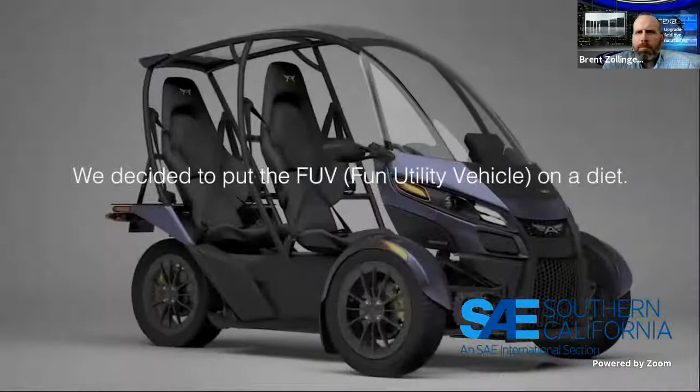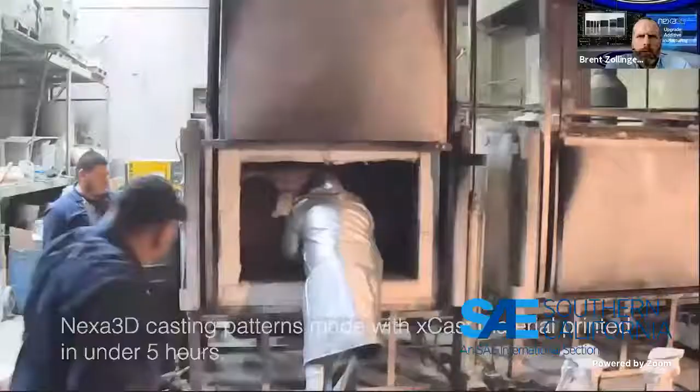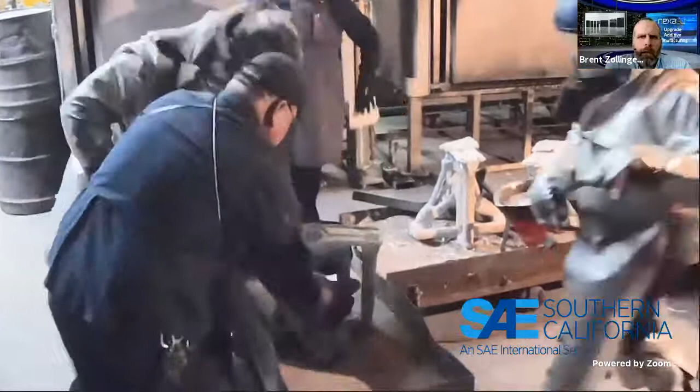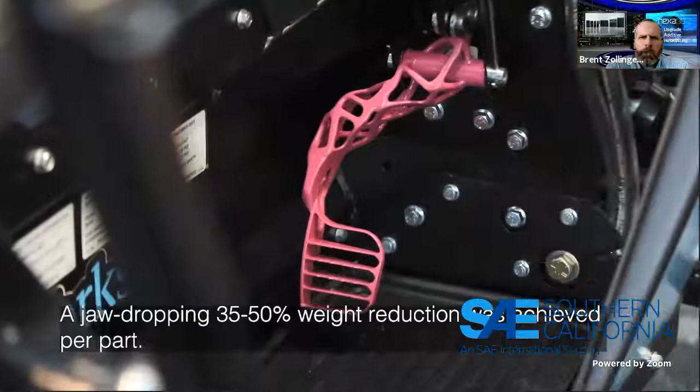In this project, what's amazing is how quick it is to do generative design. Some of the challenges at first are essentially creating your starting file or build envelope, and understanding the different ways for the analysis you'd need to build in your constraints and load cases. The real value comes from additive manufacturing's ability to make these organic shapes easily, and then casting gives you the ability to make them affordable. Printing in polymers gives you a much faster speed and a much lower cost basis than direct to metal printing alternatives out there, so printing patterns is not too out of line with conventional tooled patterns.

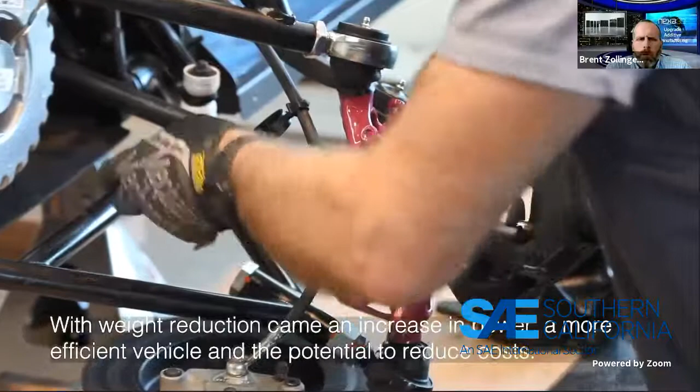Especially when you're at lower volumes, the NXE 400 printer has a cost and productivity basis that gives you the chance to go to relatively significant volumes for these kinds of lightweighting applications. This project was done as a feasibility study or proof of concept. You can see there the CEO of Arcimoto and the CEO of Exponential Works and Nexa3D showing off the vehicle.

So this vehicle, if you're not familiar with it, it's a 3-wheeled electric vehicle that sits 2 people in tandem. It's street legal for the most part. There may be 1 or 2 locations where it requires a motorcycle license in a few states, but most places it does not. It's got a 75 mile per hour top speed, 100 miles of range in city driving, 77 horsepower, and under $18,000 starting MSRP. So an interesting vehicle. It's been interesting to watch this company as it grows. This, I think, is their 5th or 6th iteration of the vehicle.

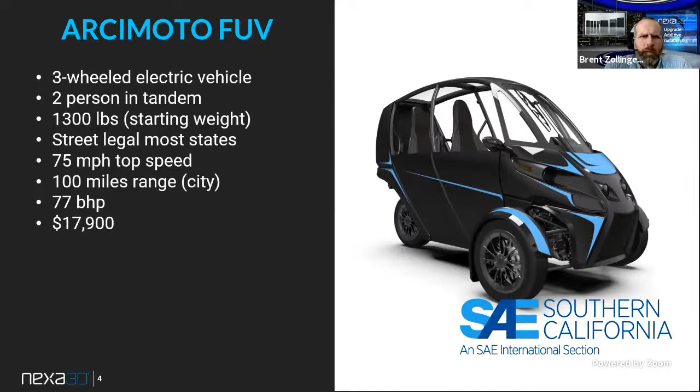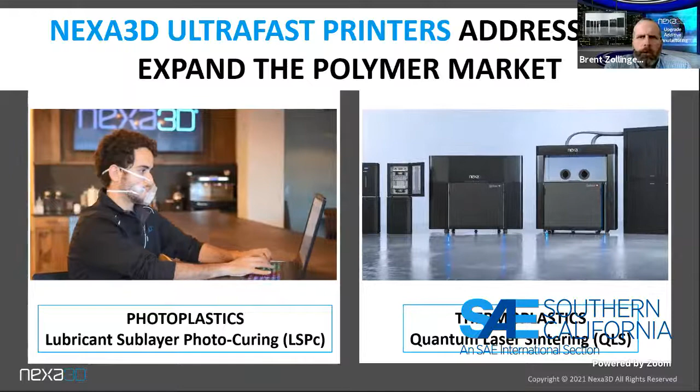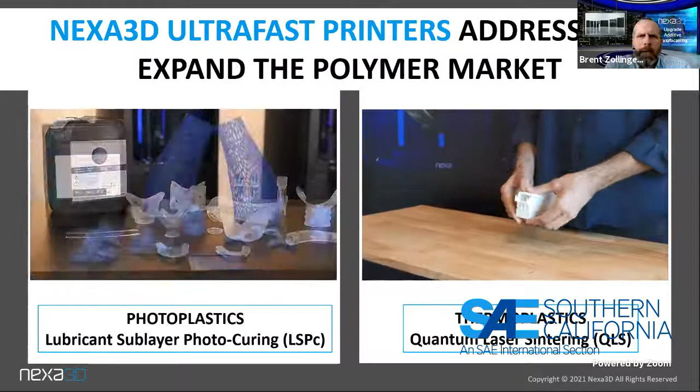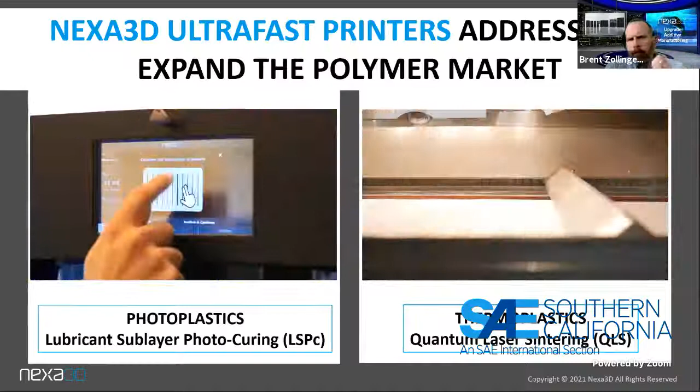And then I'm going to introduce Nexa3D, which we're an additive manufacturing company with the target to make high productivity additive manufacturing solutions, digitizing the world's supply chain sustainably. So Nexa3D is focused, 1, on photoplastics, which is what we used in this case. The NXE400 works with photoplastics or photopolymers, and specifically here we did castable plastics, which can be used for investment cast patterns. And then on the right, you'll see the QLS line, which is sintered thermoplastic materials. And this is another high productivity area where we can get, both are offering essentially tool-less manufacturing methodologies that allow a high level of agility to the supply chain.

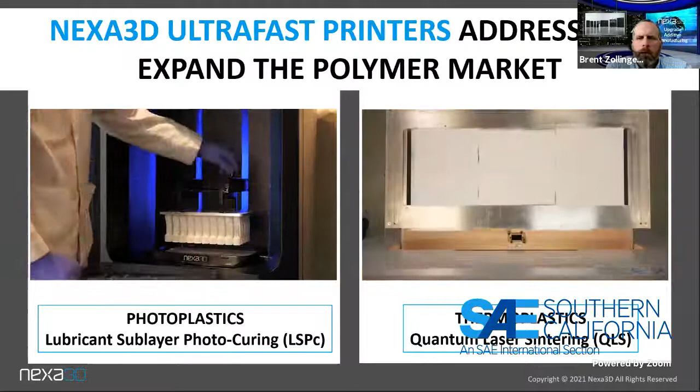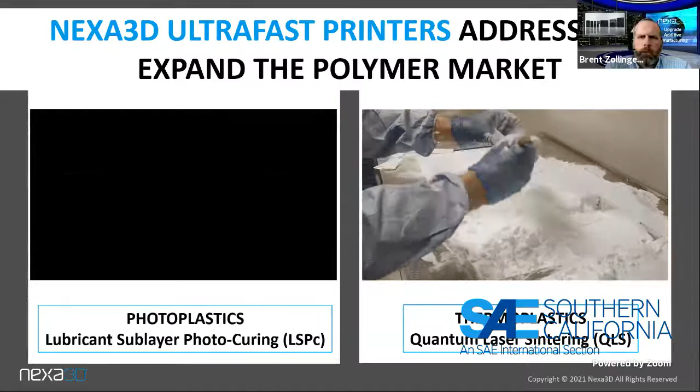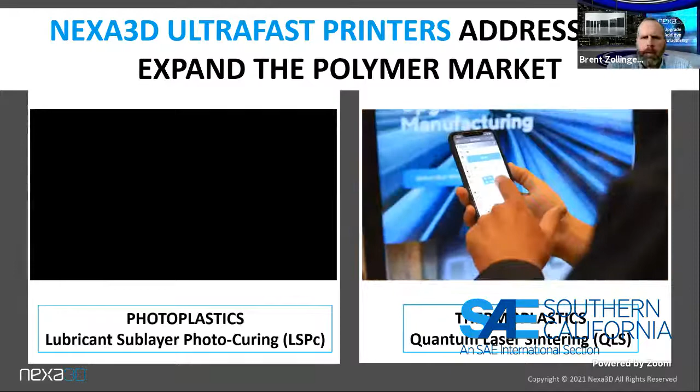And we're seeing a lot of interest from many different industries on seeing how either parts can be done at low volume without tooling, or how they can be done on demand for spare parts, or how they can be optimized to make non-producible geometries otherwise, due to some organic shape or difficult to tool shape.

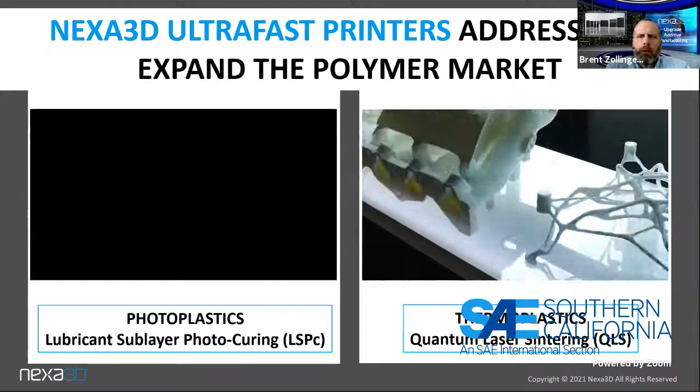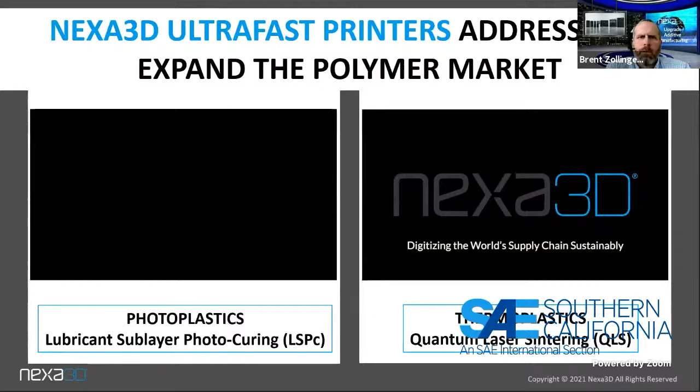So going through the learning curve with additive, I come from kind of a conventional background where a lot of castings were used in the turbo machinery market, supporting automotive, both passenger and commercial vehicle volumes. And that's one way where I came to be familiar with both of these. So the trick here is building up a supply chain that allows, that's one of the tricks. The other trick is developing the know-how to design for this process. And often it's best to design additively rather than subtractively. I'll try to explain that a little later.

I'll go next and just cover a little bit about the printer that we used. The model printer is the NXE400. This is printing one layer of photopolymer at a time, and so it prints relatively quickly. Depending on the resin usage and some other variables, we're able to print, let's say, a full build volume in under 2 hours.

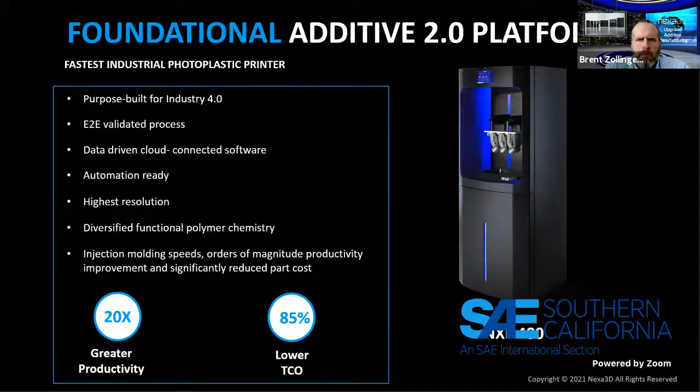For example, we have a number of customers, one of which is Flyer, which is an electric bike manufacturer that's kind of in the similar industry. And they're using both elastomeric type materials as well as conventional high durability thermoplastic materials. I'm sorry, not thermoplastic, but the thermoset materials or photopolymer materials we're using in this process are not meltable, let's say. So once they solidify, they stay solidified. They have a lot of variations in chemistry, and we work with the world's leading chemistry compounders like Loctite or BASF or Henkel's to develop resins and tailor them for this process. So we have some resins that are like ABS in performance, some that are like acrylic, some that are like polypropylene, some that are like elastomers or soft rubbers.

And then the other company involved in the project is called ParaMatters, and they're a software company, and they make a product called CogniCAD. You can see some other projects we did similar to this with an earlier company where we did some other lightweighting on another vehicle. So we've been working, and they've been working with and have software installed at a number of automotive companies and other industrial companies.

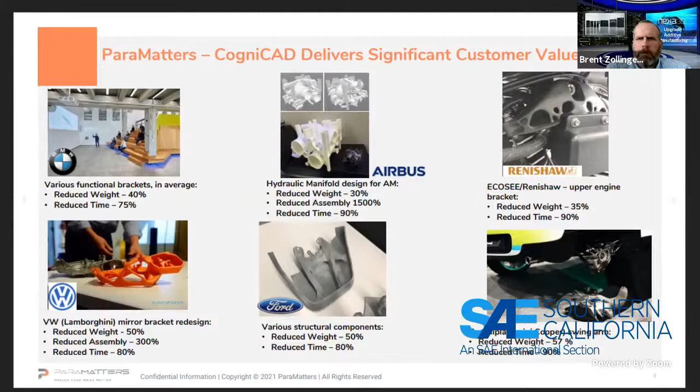So they have a fair amount of experience with how to do lightweighting for vehicles. You can do this with either plastics or metals. The way to do it efficiently with metals, I think, is through a casting means. But you can also do it like this Renishaw one, which was done with a boutique motorcycle builder engine mount. This one was just printed directly to metal, but that becomes a fairly expensive part, typically costing on the order of $4 to $8 per cubic centimeter of material, fully manufactured.

So they have techniques within the software that let you do optimization, meaning you provide a build envelope where the space is constrained. You essentially say, this is the space I have available. You then specify some non-design areas, meaning typically the interaction points or mating points with other components in your assembly. And then you apply loads and let the problem solve.

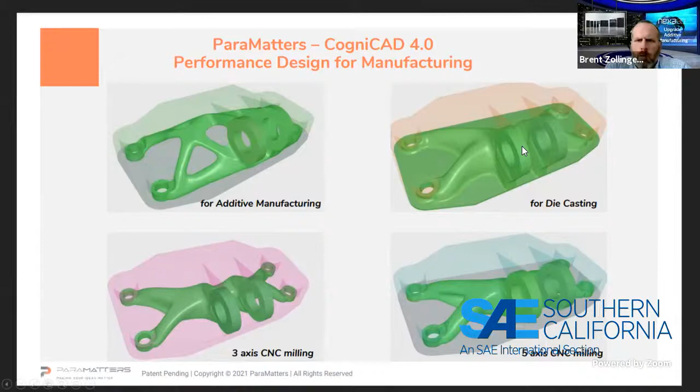The software will then guide the solution, and you can put constraints on it for different processes. For additive manufacturing, typically there's very little constraint, but it will typically try to build in a way that reduces support content. You can also apply constraints designed to allow different types of milling or casting, which can also be fairly useful for molding.

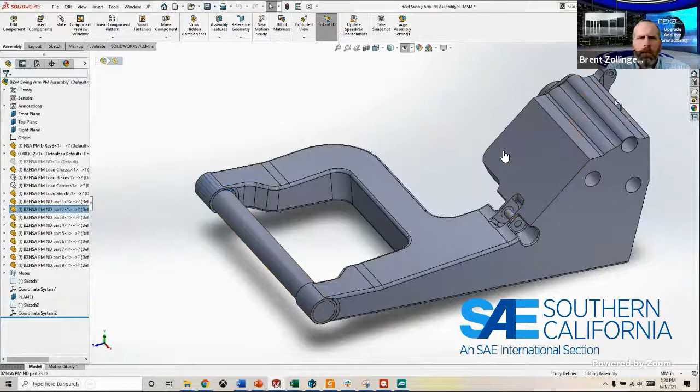So here's a little video. I'm going to walk you through the process of the rear swing arm that we did on the vehicle. This large gray area you see is the available space. Essentially, I took as much room as I had, saw how much it could swing without interfering with other vehicle components, and cut out where the tire was and where I needed to mount the brake, shock, and other components.

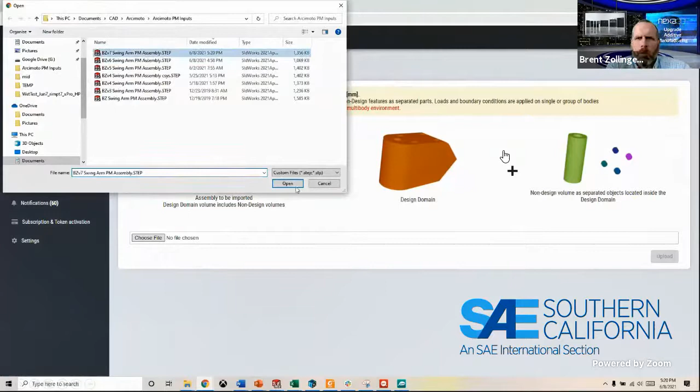So those other little features are then modeled as separate bodies, and you save it as a STEP file. Once you do that, you go to the CogniCAD solution and import that STEP file, which is an assembly of these bodies. Once you have that imported, it'll load and enter into the design space. You open it up, and now you go through the process of setting up your problem for solution.

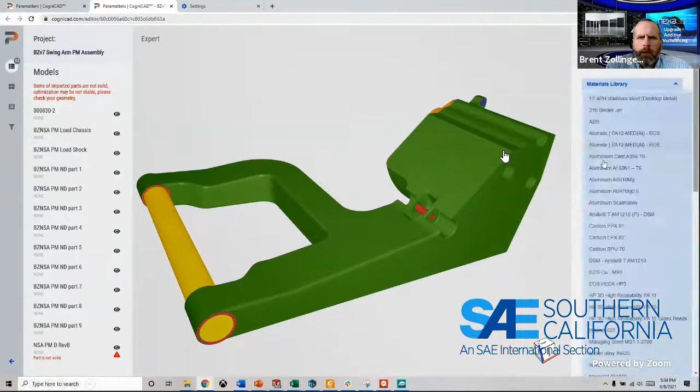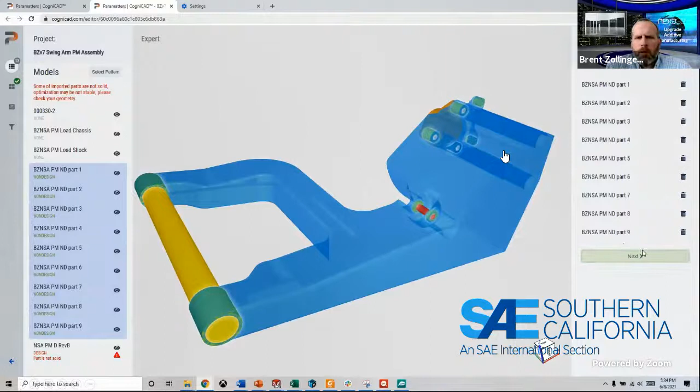So you first assign the material — in this case, we designed it for cast aluminum. Then you define the design space, the area that it's going to optimize. Then you pick the non-designed features, which are essentially like bosses in this case, where I know I need mounts for the hinges, the bearing carrier, shock mounts, and brake mounts. And then I have a couple options if I want to do pure generative design, which is what we're doing here.

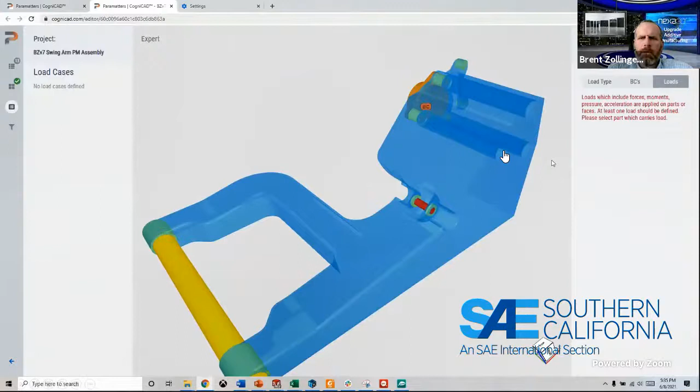I can apply different load cases, and I'll be able to weight those later on. For each load case, I'm going to set a boundary condition, meaning a part or parts which are essentially fixed in space, and then assign loads to other parts. So I brought in this bearing carrier assembly as a part so I could freeze it as a boundary condition. In this case, I'm essentially saying that the wheel represents zero position and everything's going to swing around that.

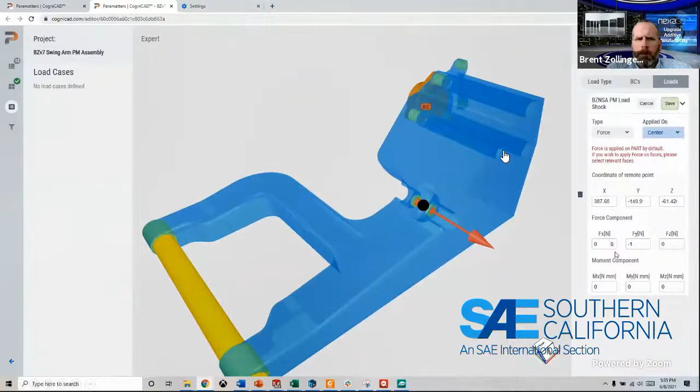So I've done some free body analysis to understand which loads I need to put on the other elements, and I'm applying them here. I actually also put in some crossbars where I'm applying the loads, and those are there just to carry the load, but they're not part of the design itself.

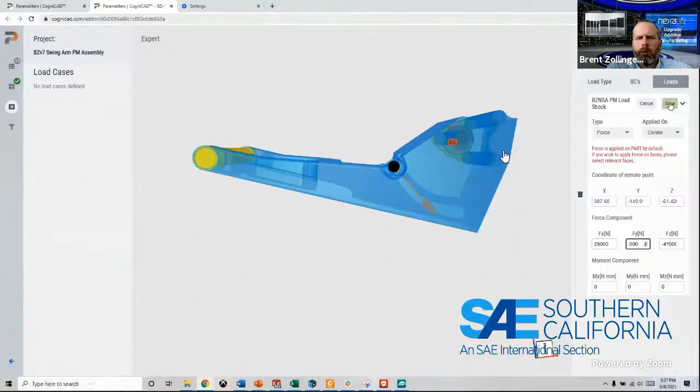As I'm going through that, I'm first doing a load case that represents — I think this one was like if you hit a pothole or an impact on the wheel. And then the next load case will be for heavy braking or a skid. I could then add potentially other load cases to this.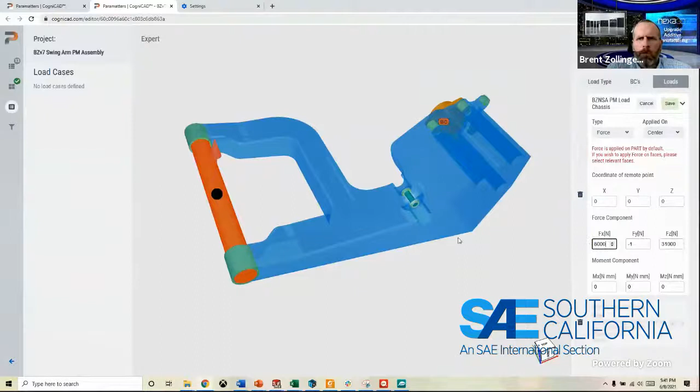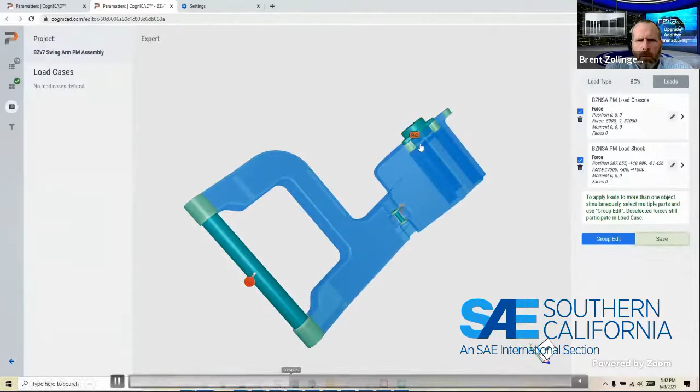You're able to put in loads in different ways, as pressures or accelerations. You're also able to do thermal loading conditions in another module if you want to optimize for heat generation or heat exchangers, which is fairly interesting. Then once you've loaded or created your load cases, we'll put this into a solver. I'm going to skip ahead a little bit.

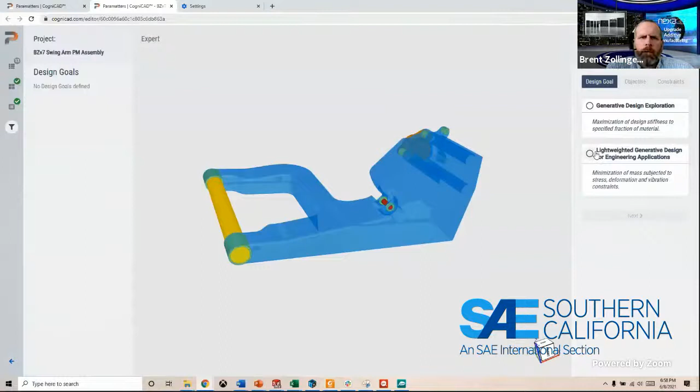So I have two options on how I solve it. I can either solve it and say I want you to keep X amount of material, or I want you to solve for a minimum mass, or for a target stress value. It can do either way. I can weight my load cases separately or give one more weight than the other.

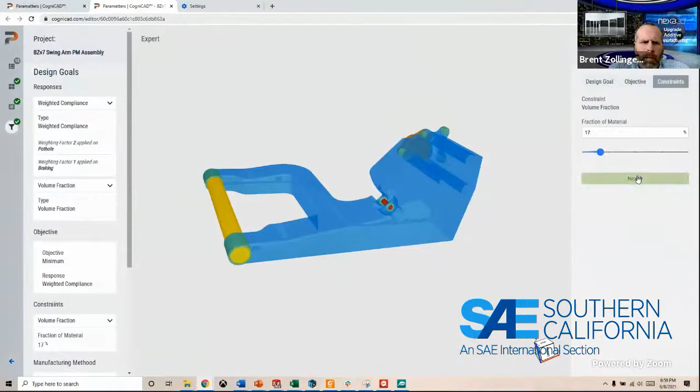In this case, I'm doing a volume fraction, so I'm just going to decide that I want the part to weigh X, and I'll see what the loads will be when I do that. I can also solve it with different resolution settings.

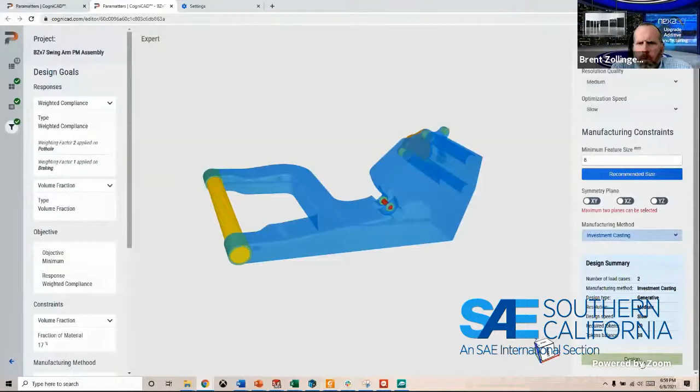As you go higher resolution, it may take more computational resources and time to solve. I can also set the constraints of the process here. So I set this as an additive manufacturing constraint, and I can set a minimum feature size, meaning if I'm going to cast it - or I may change it to casting - the minimum feature size is like the minimum bar or grade, because I don't want very fine elements in my casting. So I'll tell it the minimum feature I want within a certain range, and then it'll send it off to compute and design on the cloud.

So we're going to skip ahead. It may take an hour or two depending on how big the job is, but I'll come back and open this up and show you what the result looks like.

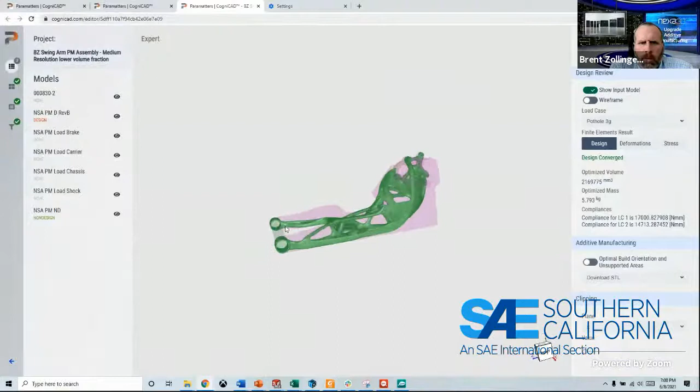You'll have essentially now an optimized result. I can see it in the context of the design space I initially provided, and then I can see my deformations and/or stresses in different axes. I can go and probe and determine where the high points are.

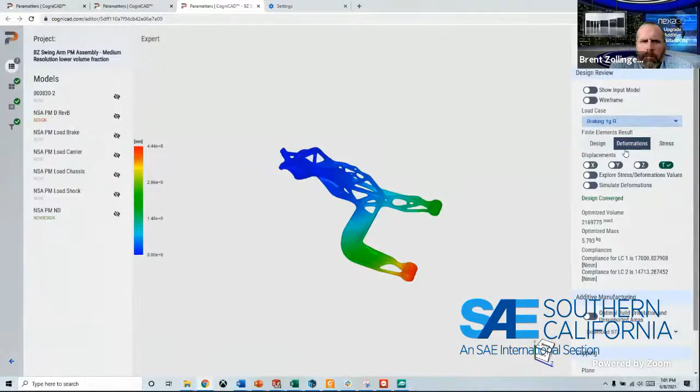So here we're seeing we have a fairly high deformation under high loading, but the stresses are relatively low, or within the range I might be comfortable with for this material.

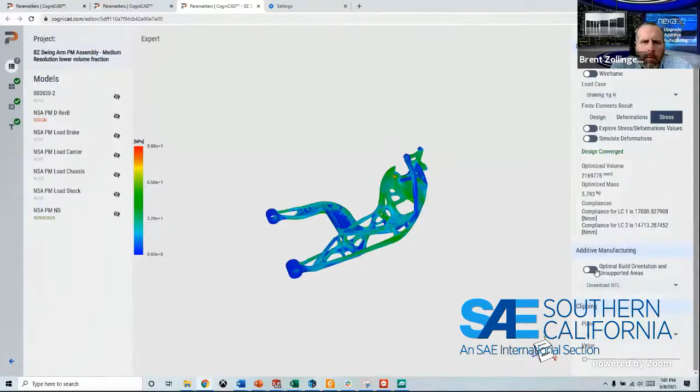And then you have the option to - there's a number of topology optimization solvers out there. The reason we use this one is it allows you to save, the output is actually very clear and easy to use with additive, meaning it doesn't require a lot of repair or manual redesign like some of the other solvers. It also gives you the option to download this as STL or STEP.

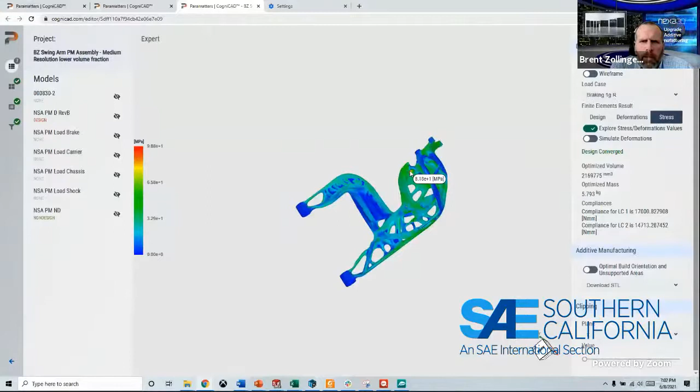So in STEP, I can now import it back into CAD, and I can put machining bosses on it or some other tweaks that I may want to do. Like for a casting operation, I may want to actually mold in the risers or something, so I can print those along with it and take it into a casting simulation.

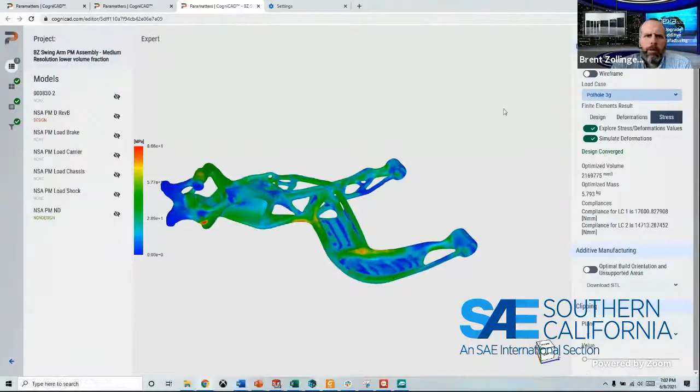So I think that's how the process goes, to give you a feel for it. I don't know if we have a lot of people that get involved directly with design of parts, but that walks you through the tutorial of how it works.

Typically what I've found - I've done this on about 10 or so different automotive components - I'm usually able to achieve between 25 to 50% weight reduction on those components versus the conventionally manufactured methods.

The challenge with this organic design is actually designing it from the ground up. So these design tools, like topology optimization or other generative design - which might be more guided than a pure solver - allow design engineers to come up with geometries which will enable additional performance or lightweighting. Typically these geometries are the ones which can be additively manufactured fairly easily, but may be difficult with other processes.

So in this case, as I mentioned, we chose to print the patterns. The cost of the patterns - I would estimate for the wheel hub that I showed, I'll actually go through those - is relatively low. It's probably more than traditional wax, but there's no tooling involved.

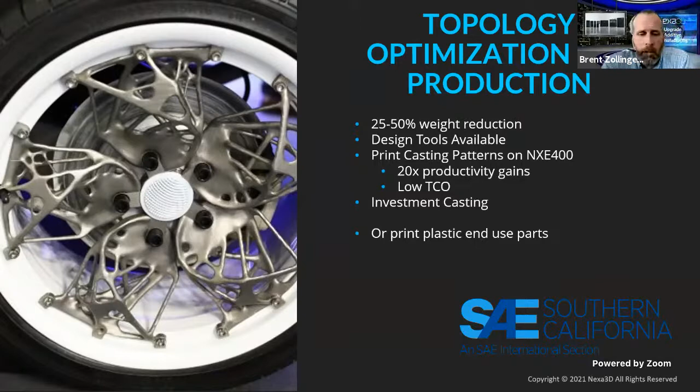This can help with either low volume applications or middle volume applications, mass customization, or other topics. To highlight some of the parts we did on this Arcimoto vehicle, I'll highlight some of the areas where we saved weight and what we achieved.

In this case, we're going from a weldment, the way they were doing it, using mild steel. They had a 9 kilogram weldment with 11 pieces there - some bent tubing, some sheet metal, and some milled components that all get fabricated together. We're able to turn that into a single casting that also saved us about 30% of weight.

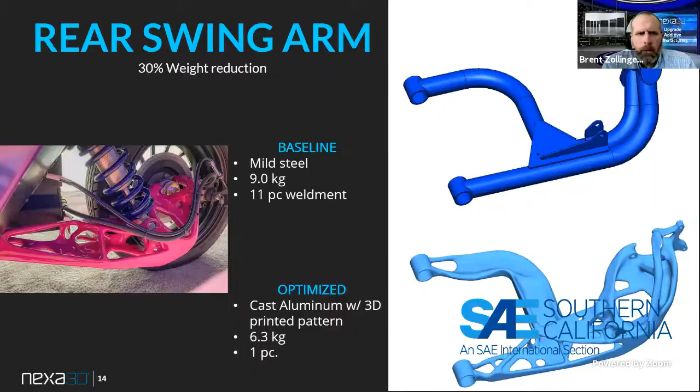So I jumped too far ahead. The next one's this hub carrier, kind of a steering knuckle component. Again, we're going from steel fabrication, in this case a 9-piece weldment, to a single piece.

This one actually, we could cast it or you could print it directly in steel. I have one of both now. I first printed it in steel - that was about an $800 print. Doing this as an investment casting, we're able to get the pattern printed for about $30 to $40. It becomes a little more achievable for certain applications. The cost is highly dependent on the build volume that you're utilizing, so as parts get bigger or smaller, the cost changes quite dramatically.

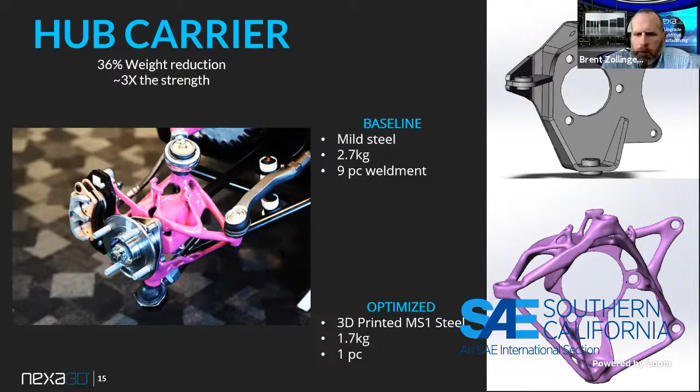The upper control arms, we also reprinted right and left. Here's another case where we went to a cast aluminum pattern and had about a 50% weight reduction.

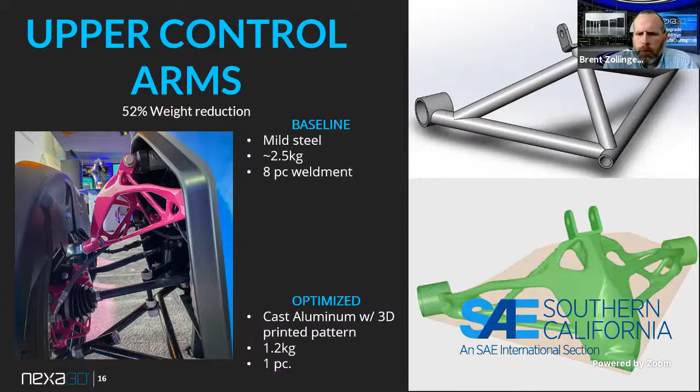And finally, we also redid the brake pedal. This is one that's fairly small, and you could fit probably 6 to 8 of these on the platform. The cost for the pattern here drops quite a bit to maybe more like $10 or $12 in that range if you do it in a volume application.

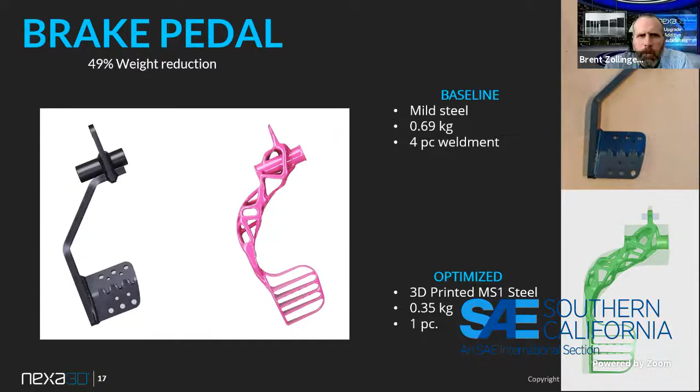I hope that was interesting. I'll open it up a bit to questions now. I think that's the end of the presentation. I appreciate everyone's time to listen.

Now, Kuba, do you want to share anything?

Thanks, Brent, for a great presentation and sharing all the details. I wanted to do a little follow-up on that - even though this project was made as a proof of concept for the technology and to assess its readiness, it's still alive, and we're at the feasibility study stage to enter this project into the commercial phase. The goal is to check if those components, like the swing arm, can actually be implemented on the vehicles or in serial production. So far we don't see any obstacles based on our cost-effectiveness study and feasibility study. So probably in the near future, you guys can see those nicely looking parts on those two vehicles.